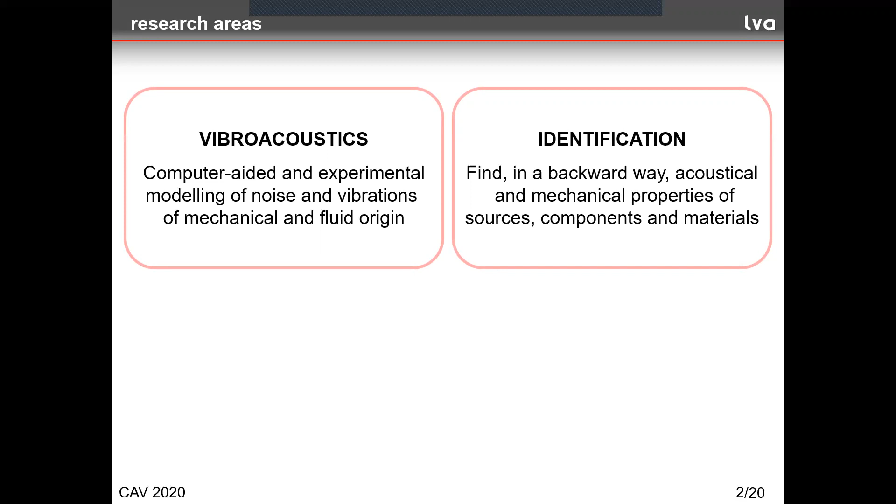When we have some free time at work, we spend it mostly on 4 research areas. Vibroacoustics, focused at modeling of sound and vibration of mechanical and fluid origin. Then identification, with the objective of finding out the acoustical and mechanical properties of sources, components, and materials. Then subjective perception of noise and vibration, where we study discomfort and annoyance caused by noise and vibration on humans.

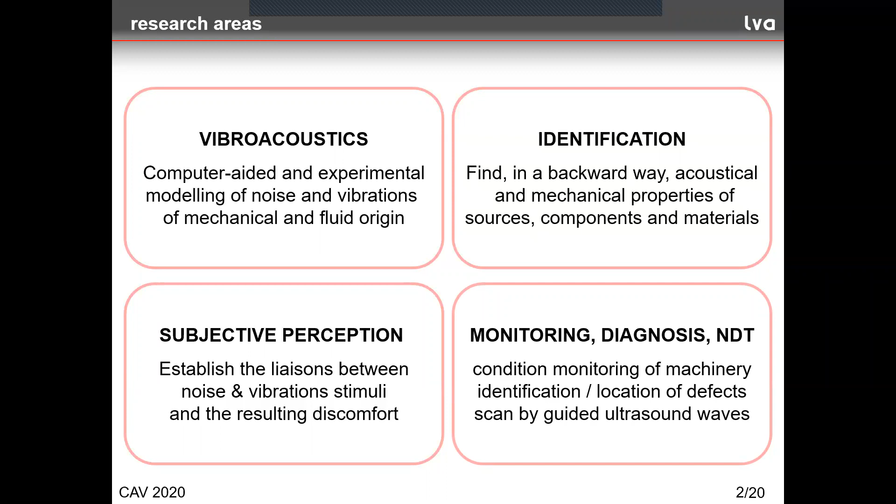And monitoring diagnostics and non-destructive testing, involving condition monitoring of machinery, mostly rotating machinery, identification or location of defects using sound and vibration signals, and scan of mechanical components by guided ultrasound waves.

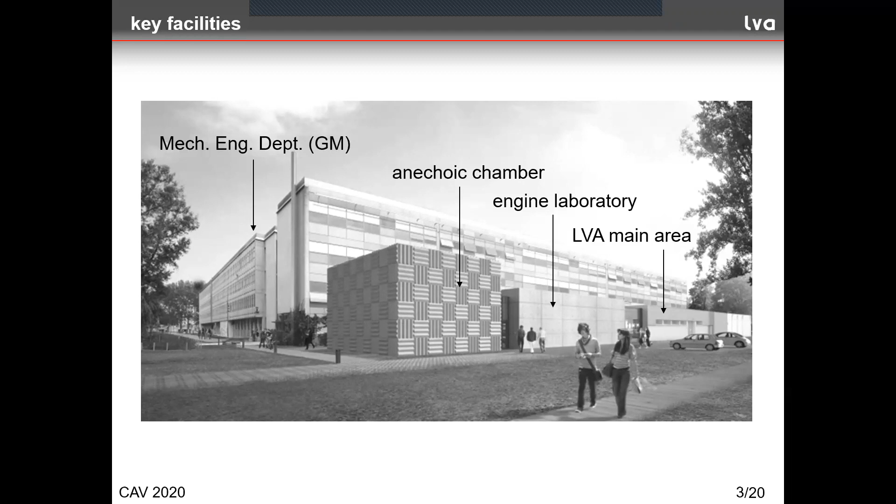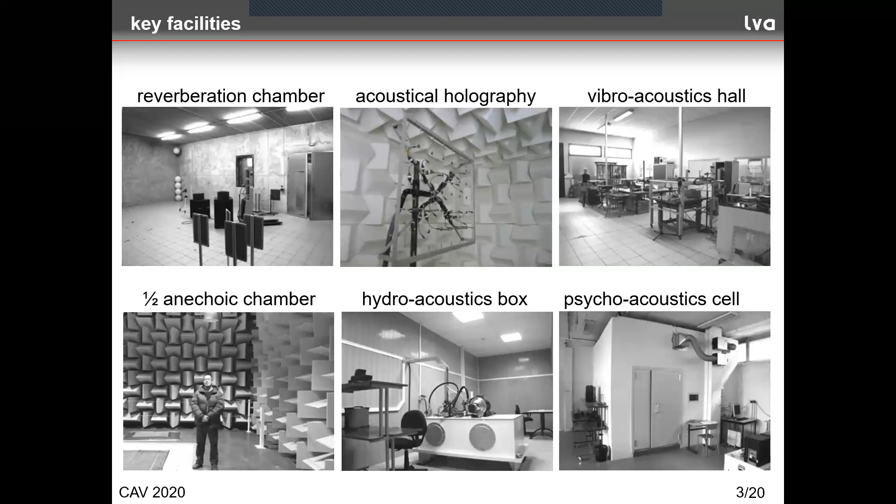To give you some idea about what we spend our time on, I will shortly present 3 typical research subjects which seem to represent some potential for real-world applications. One of them is noise transmission through elastic structures induced by turbulent boundary layer. Second topic is dynamic behavior of multi-layer anisotropic composite panels. And finally, the airborne source characterization in realistic measurement conditions.

So let's start with the turbulent boundary layer noise excitation. The applications are many. All the vehicles like aircraft, cars, ships, but also the ducts made of thin sheets, etc., are sensitive to the noise created by boundary layer in turbulence.

If we wish to measure literally the noise transmission under TBL excitation, we need to have expensive facilities like a wind tunnel, but also we are faced then with delicate reproducibility issues because it is not very easy to maintain well-controlled excitation conditions. So the challenge is to create the TBL pressure conditions using a controlled sound excitation. The good news is that there exist a number of TBL models like those of Corcos, Chase-Howe, Goody, Rozenberg, Smol'yakov, etc., which can help.

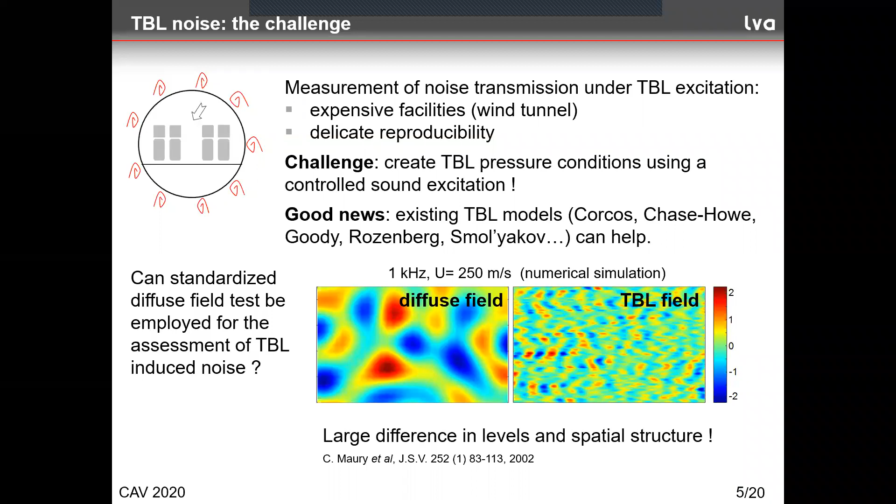All looks pretty decent for a moment, but if we look at the map of a diffuse field here and the TBL created field here, we see that not only we have differences in levels, but also differences in the spatial structure of the two fields, as it has been shown by Maury and co-authors almost 20 years ago. So the answer to this question is no, we cannot use standard facilities for the measurement of turbulent boundary layer noise.

The idea is to recreate the excitation similar to the one created by the turbulent boundary layer, but using an array of loudspeakers. The technique originally developed by a colleague, Laurent Maxit, was the following one. First, reconstruct the desired TBL pressure here from the model used. Since the model is of a statistical nature, the procedure has to be repeated many times and the results subsequently ensemble averaged.

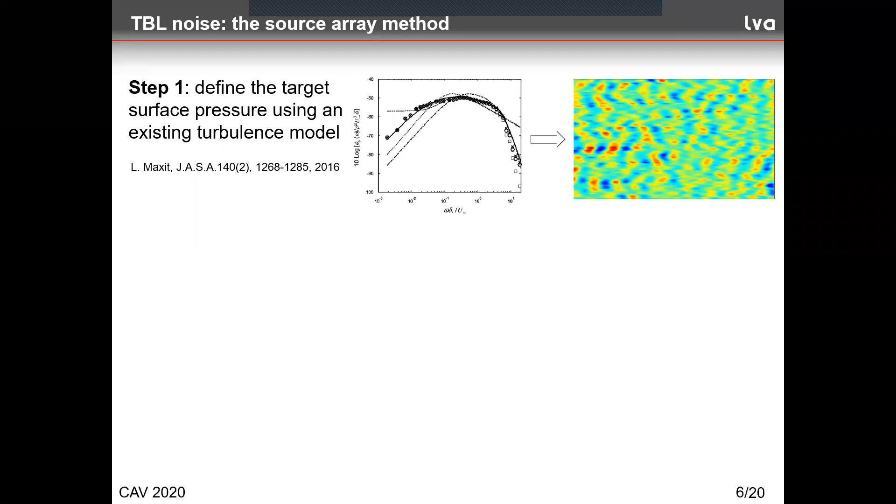Then identify by measurement the transfer functions between the sound pressure responses measured by microphones at a rigid baffle, the size of which corresponds to the targeted panel, and the sound excitation at the positions of the loudspeaker array.

Then compute by inversion the source strength needed to reproduce the modeled TBL pressure. Finally, using the loudspeakers, the strength of which has been already defined in step 2, we apply the sound to the target panel and measure its response.

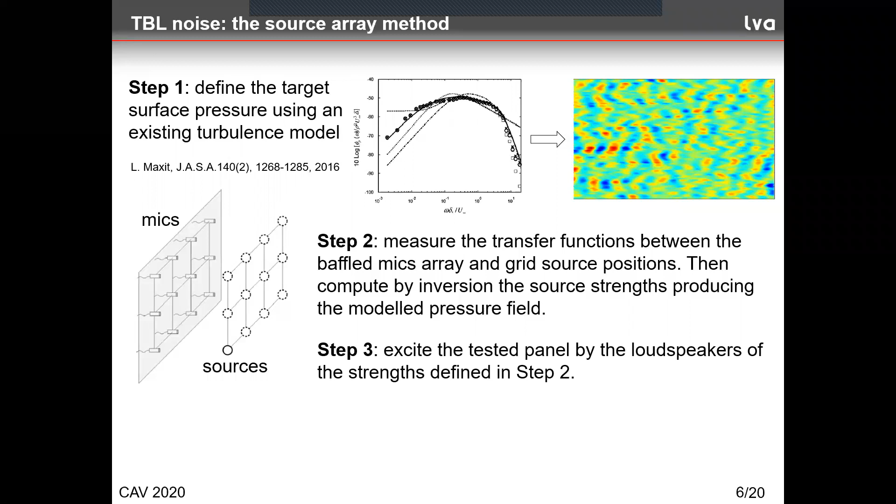The drawback of this technique is that too large a number of sources is needed in order to reproduce the fine detail required by the TBL pressure spatial resolution. So another solution had to be found.

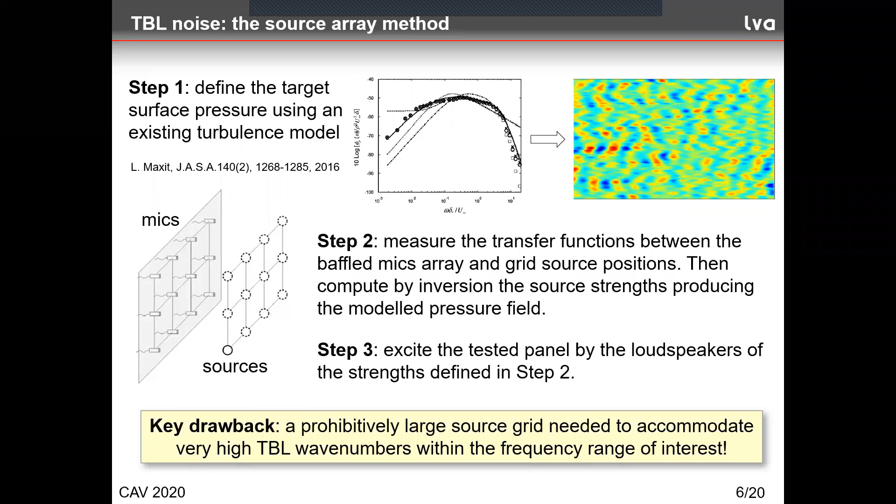So a new technique was put in place by analogy with the procedure of improving the resolution of underwater sonar scanning. It turns out that the larger the source array size, the better the spatial resolution. The array size can be artificially increased by combining the signals at different times to account for the effect of the increased array geometry. It is called the synthetic aperture array.

The new procedure starts with the modeling of the TBL pressure, just as the original procedure, but then uses the transfer functions obtained by the synthetic array. A line array of microphones embedded in a rigid baffle and a single point source is all that is needed. The source is simply a nozzle connected via a hose to a compression chamber actuator.

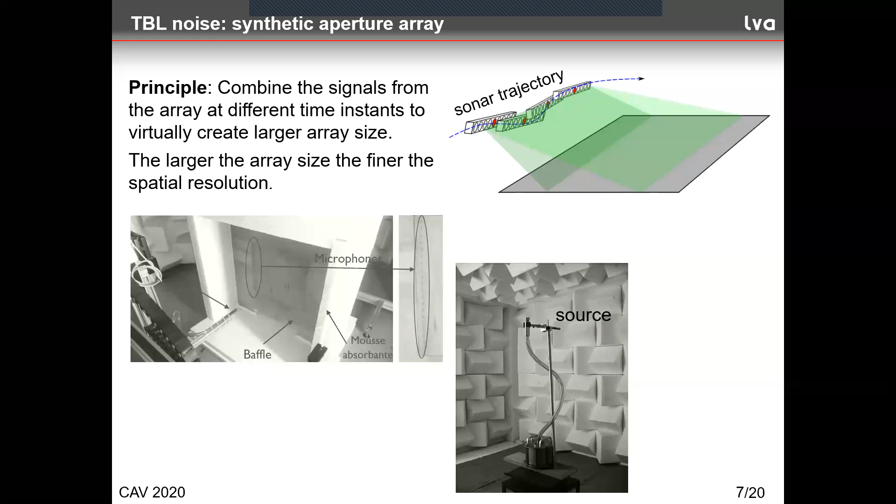Then step 2 here is to use the microphone array to characterize the source for each position. Once this is done, step 3 is to characterize the response of the panel. And finally, step 4 is to synthesize the panel response under the TBL excitation using the target pressure obtained in step 1.

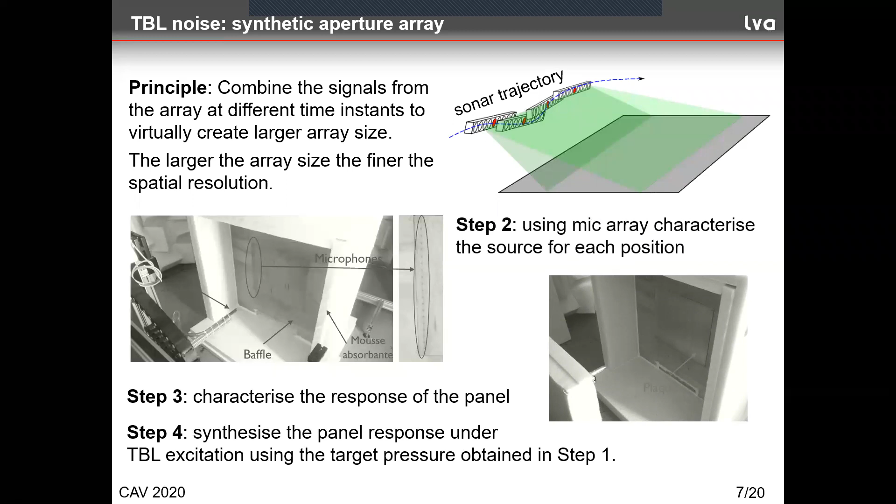The new technique was validated in different ways. First, since the computation is done at each frequency in a 2D wave number space, a check was made about how well the synthetic array reproduces the originally defined TBL pressure. Here is an example showing one of the two wave number components, the component Kx in the lengthwise direction.

The top map here is the original pressure. The bottom one is the pressure reconstructed using the synthetic array. The matching looks fairly decent. At low frequencies, the matching suffers due to the long wavelength effect.

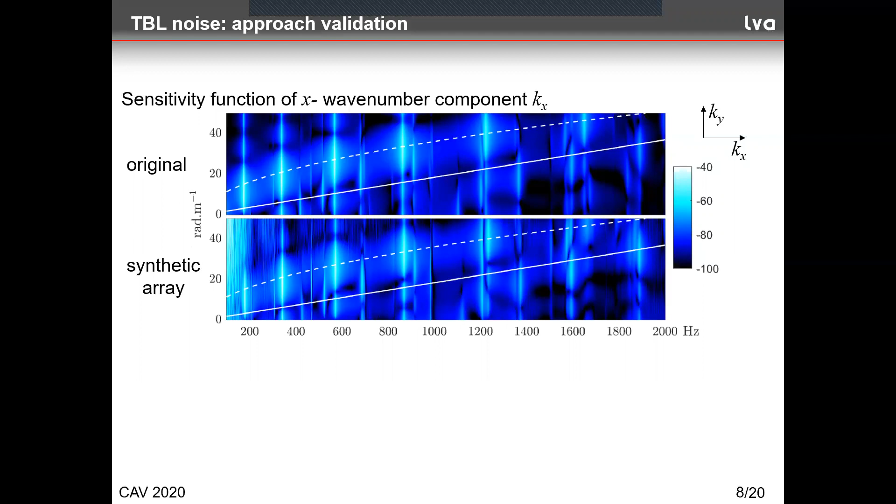The ultimate validation was done by comparing the vibration velocity of a simply supported aluminum plate, which was directly measured in the wind tunnel of the University of Sherbrooke, and then computed at our lab by the technique shown previously. Here is the plot of the spectra in terms of the power spectral density of the plate vibration velocity.

The black line is the synthetic array result, and the red line is direct measurements in the anechoic chamber of the University of Sherbrooke. You see that the matching is pretty good, which is even more remarkable when one takes into account all the hypotheses pulled into the modeling procedure.

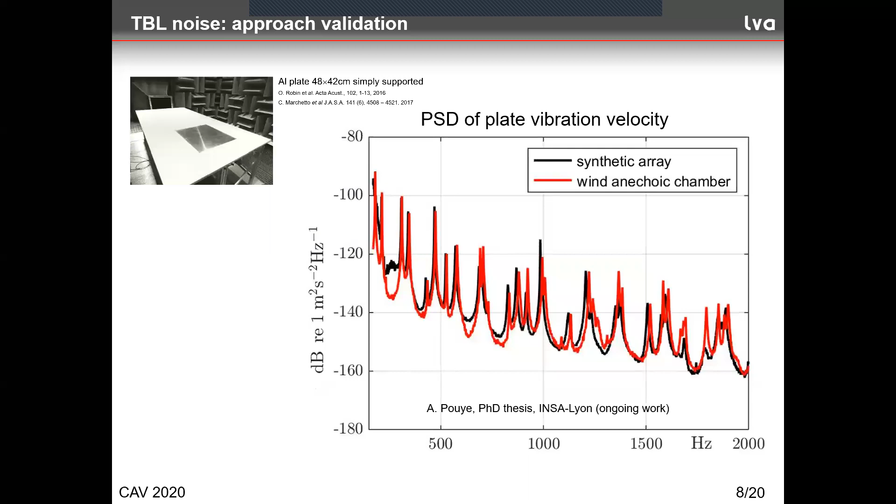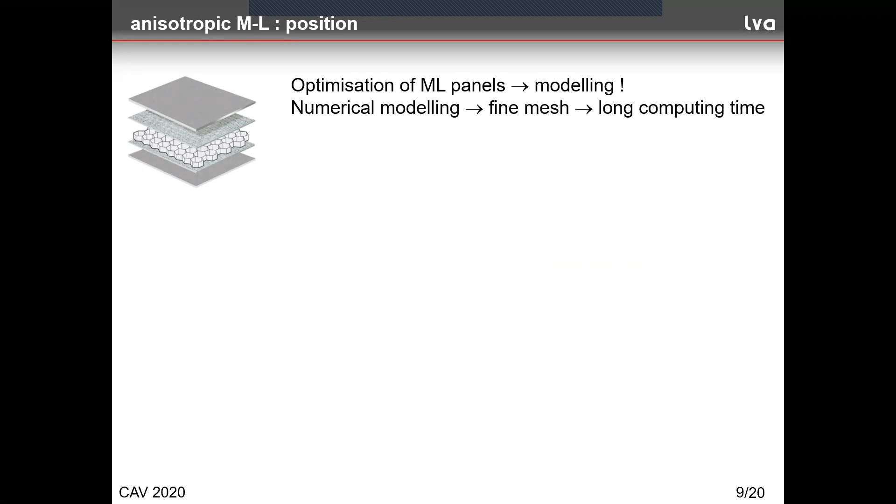We now switch to the second subject, the anisotropic multilayer panel. The importance of this type of structural component is fairly well known. In order to optimize a multilayer design, one needs modeling. Numerical modeling requires a fine mesh and can be excessively time-consuming, thus a need for analytical models. Here are some examples of such models.

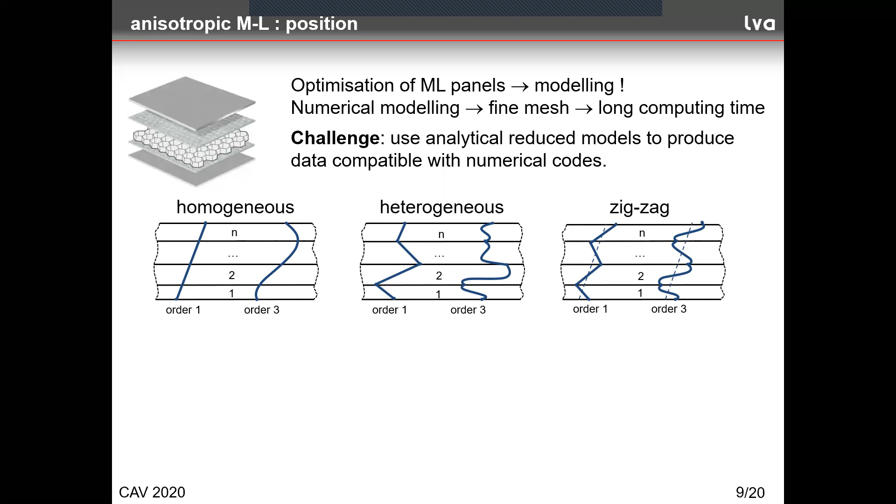A homogeneous model, with a simplified distribution of displacement across the thickness. It is simple and inaccurate. Then a heterogeneous one, with each layer treated on its own, and the compatibility conditions applied at the interfaces. This one is accurate but very difficult to handle.

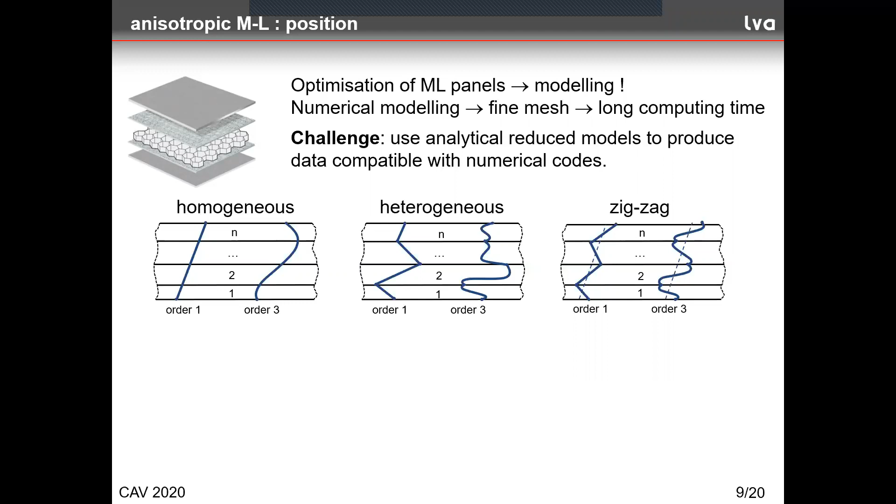Finally, a compromise solution, a zigzag model with each layer of Reissner-Mindlin type, with all the variables expressed in terms of variables of the bottom layer. Such an approach is used here to apply it to the case of multilayer anisotropic panels, producing as a result an equivalent Love-Kirchhoff plate of frequency-dependent coefficients.

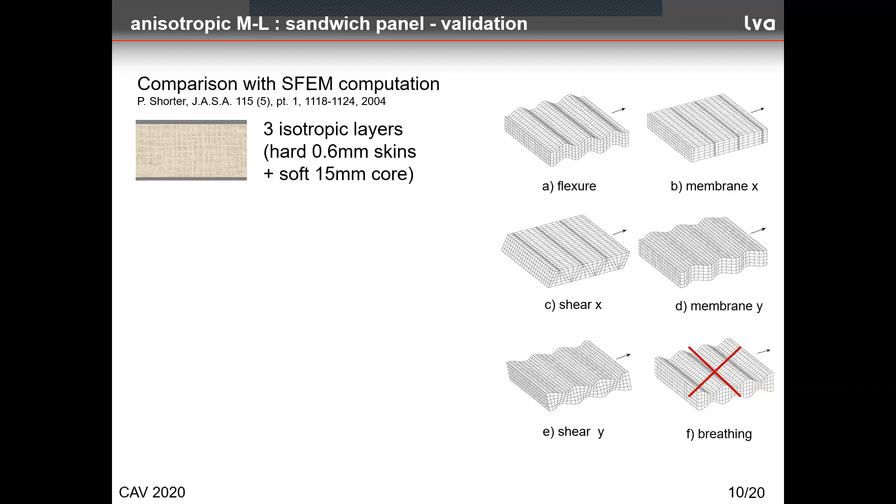An initial validation of the analytical model was done by comparing it with a numerical computation using spectral finite elements applied to an isotropic sandwich panel. The numerical model produces 6 different types of waves, which are all shown here. The analytical model reproduces 5 of these 6 types to a high degree of accuracy. We see excellent matching between the spectral finite element results and those obtained by the analytical modeling.

The 6th wave type, which is of lesser practical importance for noise, concerns layer deformation across the thickness, which is supposed not to exist in the Reissner-Mindlin hypothesis. This is why we can't have this 6th wave in the analytical formulation. So far, so good.

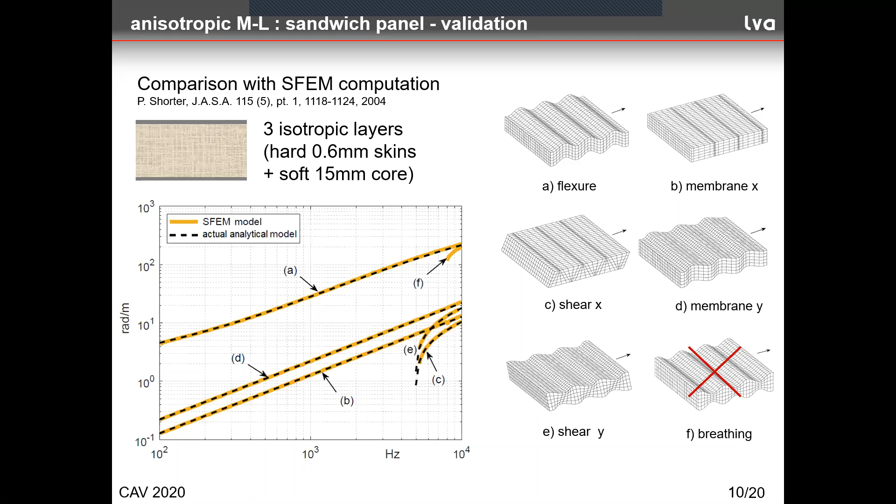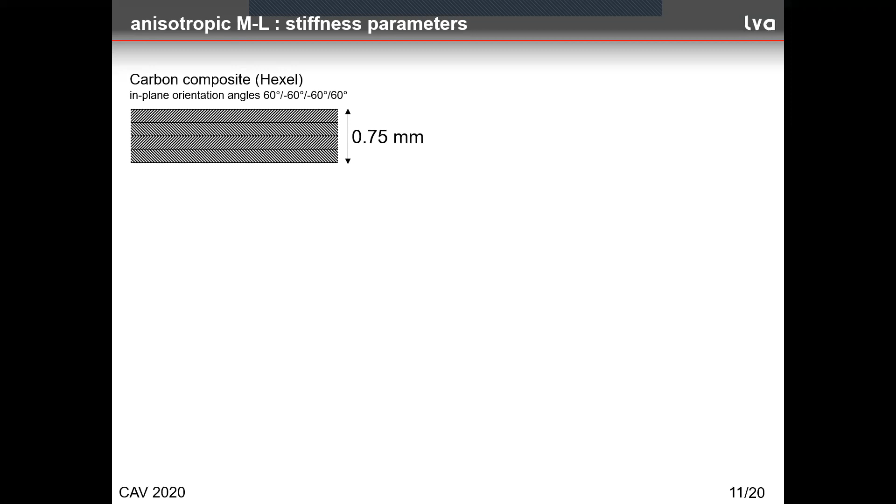Here is an example of a multilayer carbon composite sheet, fairly thin, where the layers had different orientations, shown here. The measurements done by a scanning laser vibrometer enabled the mapping of the normal vibration and its representation in the 2D wave number space.

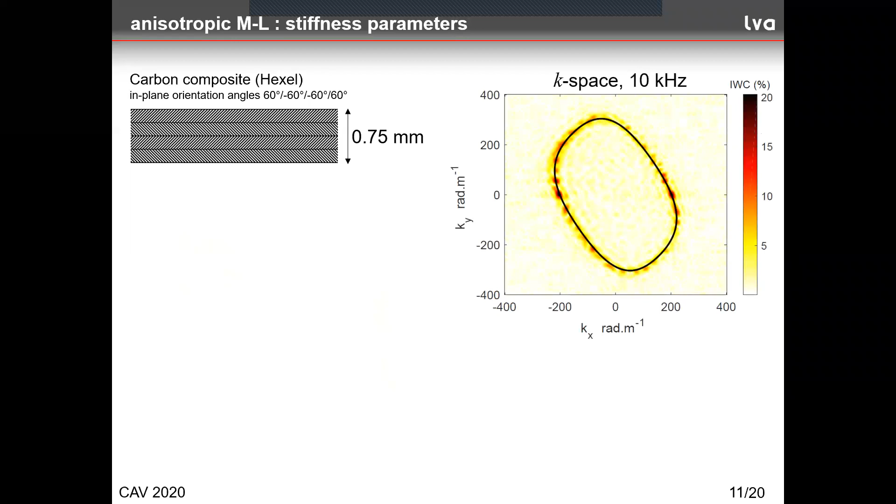The black line represents the condensed orthotropic model of the entire sheet, where the flexural wave number is given by 5 equivalent dynamic parameters. The identification was done using the so-called inhomogeneous wave correlation technique. Since the sheet was fairly thin, there was no appreciable variation of elasticity with frequency. But the next figure will show this.

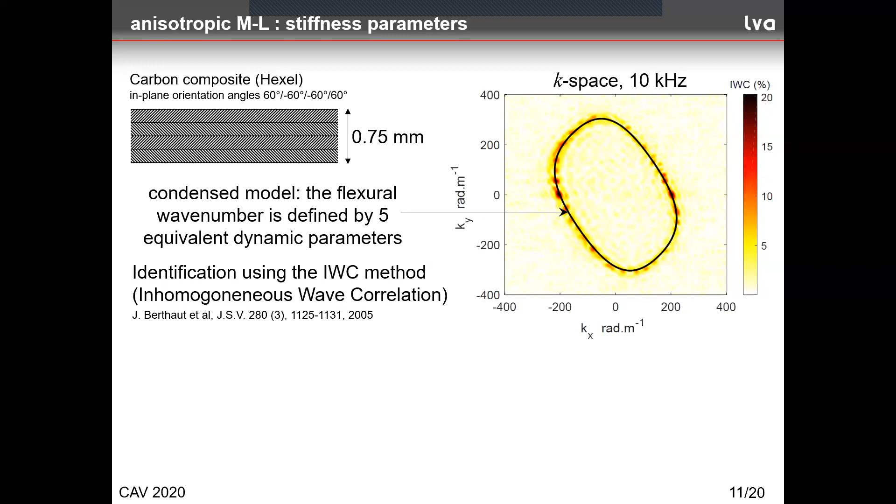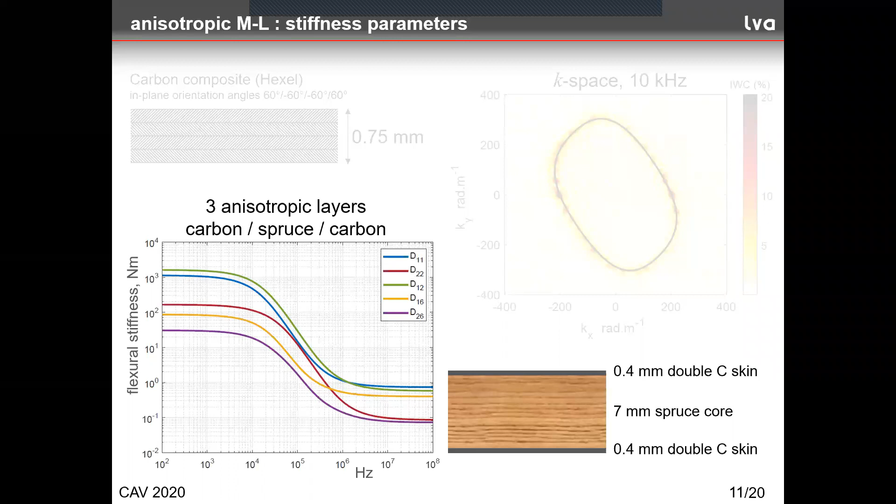There is clearly visible here the transition zone, which delimits the range of low frequencies where the sandwich behaves as a solid panel, and the range of high frequencies where the carbon sheets behave as uncoupled to the core, which in turn drastically reduces the dynamic panel stiffness. Such a behavior was already found on isotropic sandwiches by Nilsson in the 80s.

Finally, a few words about the structural damping of multilayer panels. Here we have a case of flexural vibration of an isotropic sandwich with a polymer core between two metal sheets.

The plot shows the loss factor versus frequency. The two full lines correspond to two ways of getting the loss factor by modeling. The red curve here is obtained from the equivalent definition, taking the group velocity as double the phase velocity, which is valid for a Kirchhoff plate, but not for this one.

The blue line here, obtained by the correctly identified group and phase velocities of flexural waves from the model, is seen to match far better the scattered points, which represent measurement data obtained by 4 different techniques, 2 of which are identified here. So, looking from the damping viewpoint, the presented multi-layer modeling seems to work rather well.

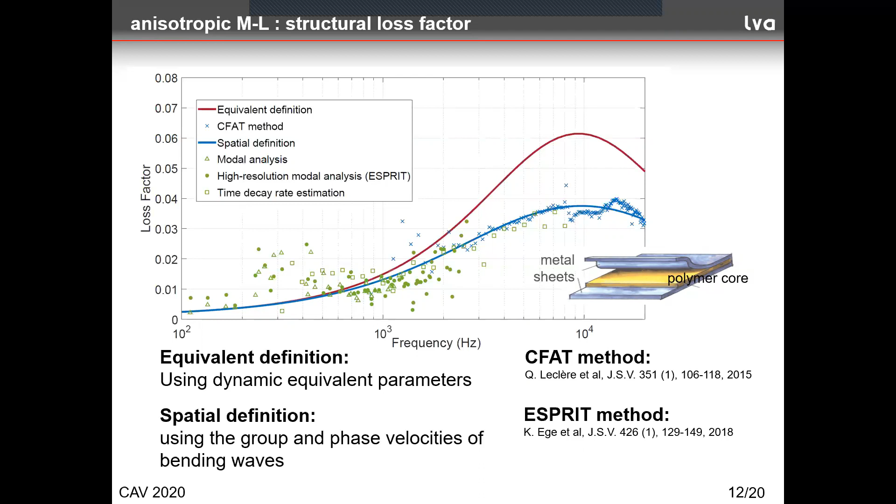And now our last subject, the characterization of a source of airborne noise. The objectives can be different. For example, the assessment of the contribution of different source parts to global noise, or the prediction of noise by the source installed in a given space, or even validation of noise computation procedures. Now, the subject looks trivial until you try to do it. In fact, the correct characterization is fairly difficult.

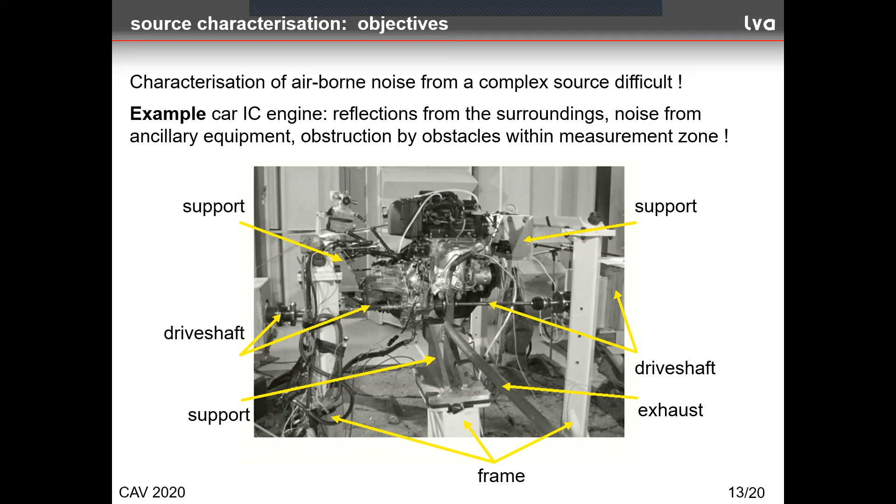Here, the example of an IC car engine. The difficulties are reflections from the surroundings, noise from sources other than the engine itself, notably the brakes needed to load the engine, effects of obstacles like, for example, engine supports here, which are placed within the measurement volume.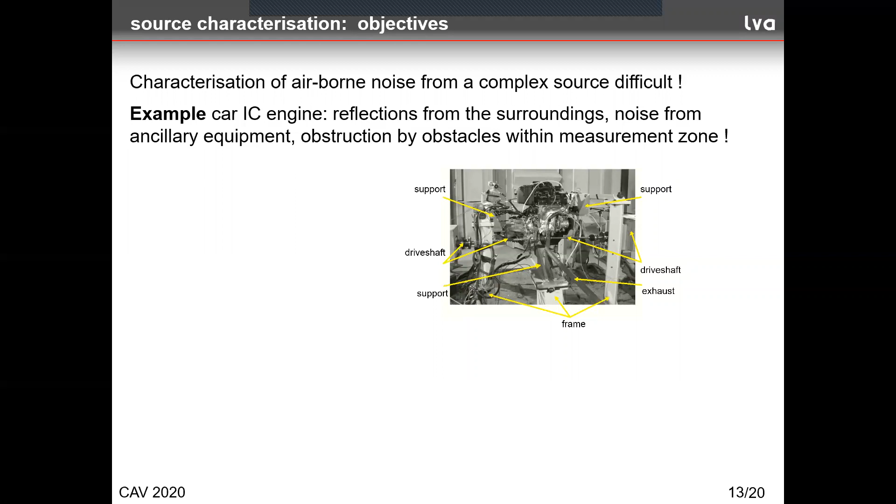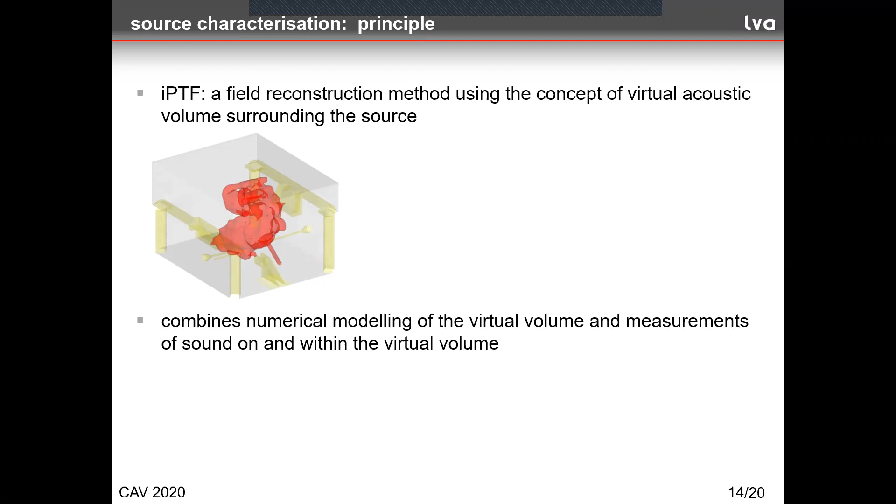Our lab has developed different characterization procedures, and one of these, the IPTF, standing for inverse patch transfer function, is a field reconstruction method using the concept of virtual acoustic volume surrounding the source. So we have here a source like an engine, and around it we shall define an acoustical volume by means of which the characterization will be made. The technique combines numerical modeling of the virtual volume and measurements of sound on and within this virtual volume.

The boundary conditions of the virtual volume can be selected according to the available sensors. For example, if we have microphones only, this corresponds to free boundary. If we have PU probes, which involve both measurement of pressure and particle velocity, then we can have blocked boundaries. The presence of obstacles like mounting frames is taken into account in the numerical model of the volume.

The sound field can be reconstructed across any surface comprising the real source surface. So we can have on the source surface the completely defined sound field in terms of sound pressure and particle velocity normal to the surface. The reconstruction process is independent of the acoustic conditions exterior to the virtual volume, at least theoretically.

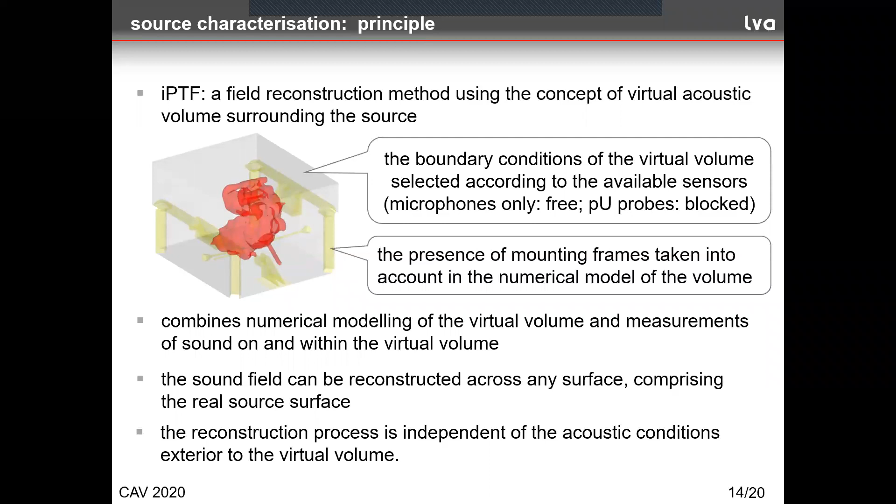The validation of the source characterization method using the IPTF technique was done in several ways. Here we see the comparison of the pressure fields in 2 points of the virtual volume obtained directly using the reference calculation by the Nastran and Actran codes, and computing using the concept of virtual acoustic volume and the 2 direct formulations of the IPTF methods. A very good matching is seen, which validates the principle built in the approach.

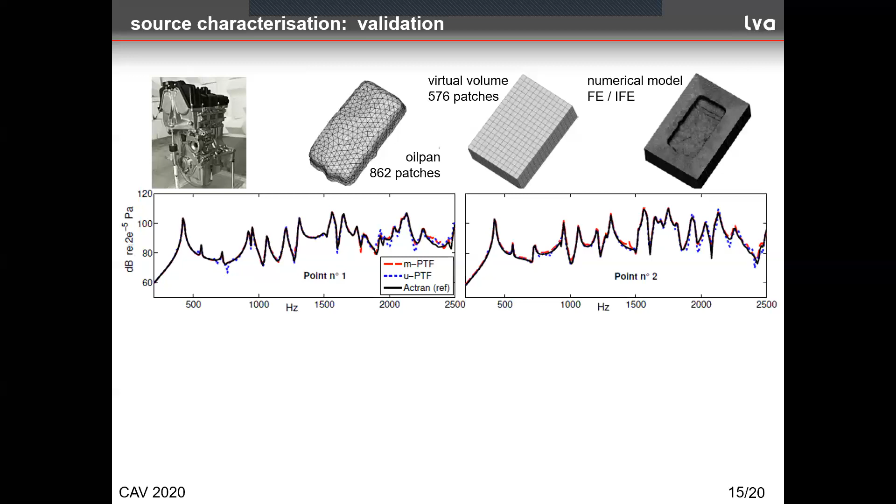For this computation, the IPTF technique was using 862 patches for the oil pan. The virtual volume was characterized by 576 patches, while the numerical model had a number of elements close to infinity, as usual.

Here we see the field of sound intensity at 1 kHz emitted by the entire engine here on the left and only by the oil pan on the right. We see the results obtained by the IPTF and by numeric computation. Here too, IPTF and numeric. To make the numeric computation possible, the engine was excited by a shaker in order to avoid possible errors in modeling the engine excitation. We see that in spite of inevitable discrepancies, the qualitative matching is fairly reasonable.

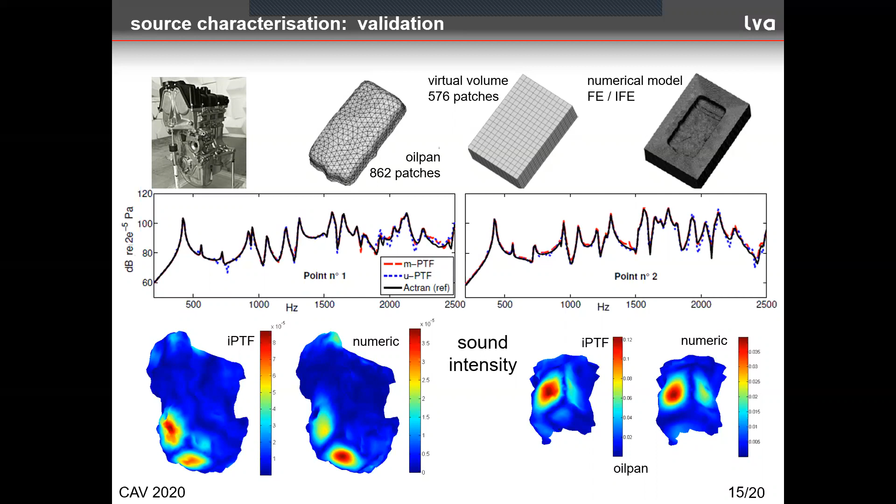This plot shows the correlation between the IPTF and numerical computation. The correlation is expressed via the so-called RVAC criterion, which is such that no correlation is 0 and perfect correlation is 1, just as for a coherence function. The 3 curves shown here correspond to 3 components of the engine: cylinder head cover, oil pan, and valve timing cover. As one can see, the correlation looks fairly decent.